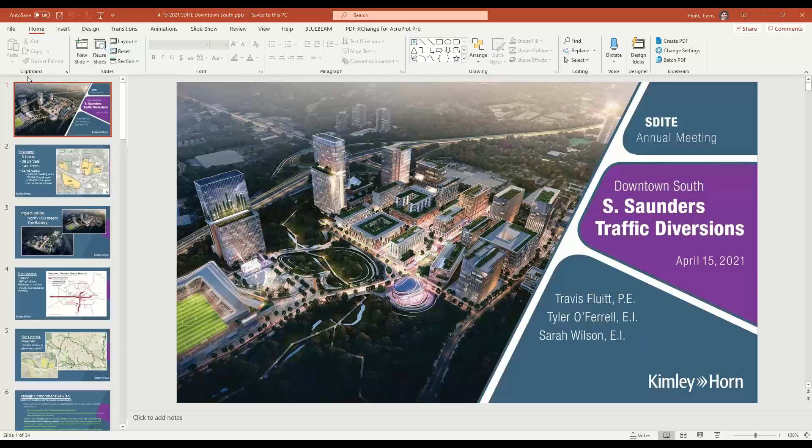Thank you, Sebastian. I'm going to attempt to share my screen. All right, hopefully everybody can see that. So today we're going to talk a little bit about the... I can't see my screen, hang on. The Downtown South development, which is the largest rezoning, at least in terms of traffic, in the city of Raleigh.

And with that, there were some challenges that we ran into. So I'm going to talk about some of the methodology we used as part of that study, and some of the assumptions. So first of all, a little bit of intro to the project. Downtown South, where it's at, is three tracts focused around the interchange of South Saunders Street and I-40 in Raleigh, on the south side of downtown, hence the creative name Downtown South.

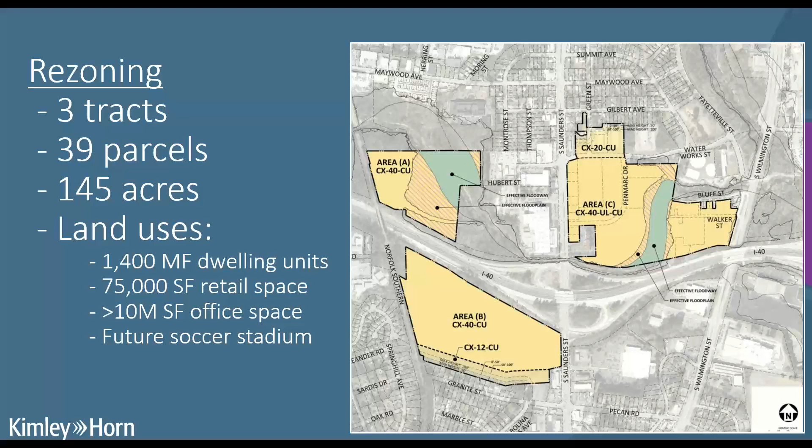So three tracts, A, B, and C. 39 parcels, 145 acres, and the rezoning would allow for up to 1,400 dwelling units, 75,000 square feet of retail space, over 10 million square feet of office space, and a soccer stadium. So for those of you familiar with Raleigh, think North Hills meets the Battery in Atlanta - a very dense mixed-use development with an entertainment component added in, just for good measure.

A little bit of context about the site. This is a shot from the Wake County Transit Plan, which is a very aggressive plan to add increased bus service and BRT through the area.

So the downtown south development will have BRT along the eastern side of the property along Wilmington Street. I think that's planned for 2027, with hourly bus service along South Saunders Street running through the middle.

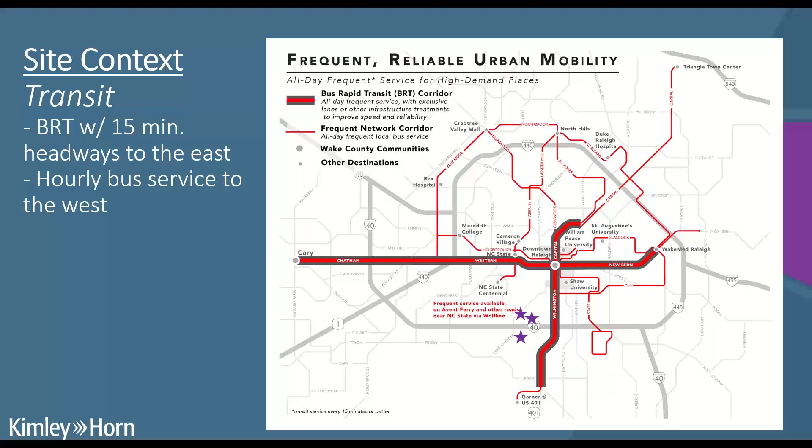Very well connected to the city of Raleigh's greenway system, so a lot of bike ped access. Raleigh has invested heavily in their greenway system, and it shows. So Tract C on the northeast corner is going to have the greenway running right through the middle of it, and that's something that will definitely be amenitized as part of this project and a focal point of the development.

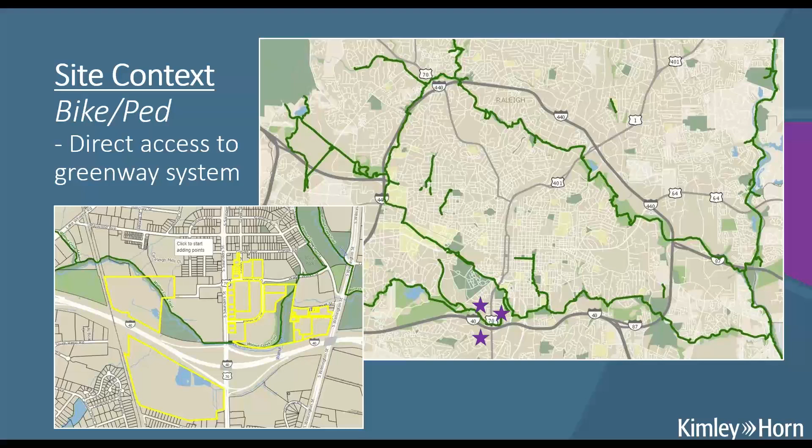So the challenge we faced with this development and this rezoning and the traffic study is that South Saunders Street is a major commuter route in and out of downtown Raleigh. It's a 6-lane roadway with 44,000 vehicles a day, so approaching capacity, highly directional in the peak hours.

But this development is going to add roughly 100,000. The rezoning allowed for about 100,000 new daily trips, most of which are going to use South Saunders Street.

So our traditional, suburban methods of TIA assumptions, doing regular ITE trip generation with minimal internal capture and mode sharing, and then the standard methodology of growing existing traffic counts up to a future year and then just dumping site traffic on top of that, was just not going to work for a development of this magnitude and the transformative nature of this development in the city.

So things we started looking at to combat this: trip generation, we looked at dense multi-use urban rates, really aggressive internal capture reductions, still a pretty modest bike ped transit reduction, but still not enough, not making a dent in the amount of traffic that we were facing.

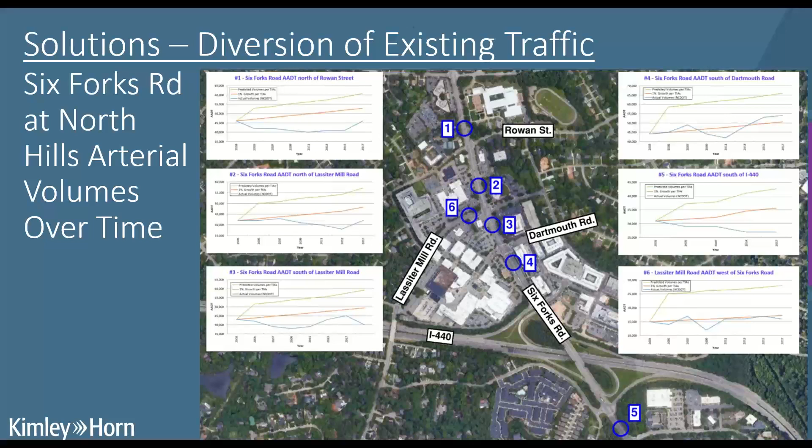So that's when we started looking at things like mode split, and I'll turn it over to Tyler to take it from here. Thanks, Travis. Yeah, just your local Florida man speaking here. So to get into the mode share kind of thing that we looked at, as Travis mentioned, there was some challenges with the congestion that is already existing on South Saunders Street.

And how we expect some of this displacement to happen is that it'll move to alternate modes. What we wanted to do is get a good data set of some other areas around the country about the mode split and how it's changed over time along their transit corridors, especially since the city is building the Southern Corridor BRT along Downtown South's front door. If you want to go to the next slide.

So a couple of the locations we looked at: Austin, and we looked at their Capital Metro Rapid bus line; Charlotte, the Lynx Blue Line, which is light rail; and Cleveland, the Health Line corridor, which is BRT.

The way we went about this is we got mode split data from the American Community Survey, which the U.S. Census puts out every year. I think they poll 3.5 million households or something like that every year, and it's updated every single year, as I said a couple times already. So it represents a pretty good data set for pulling mode split characteristics from.

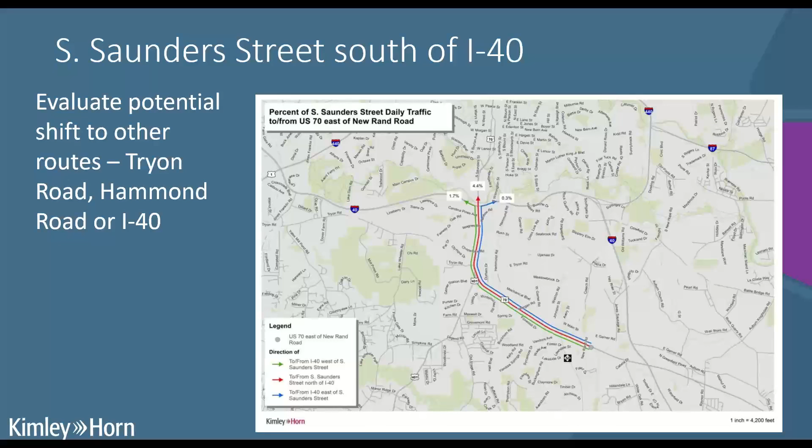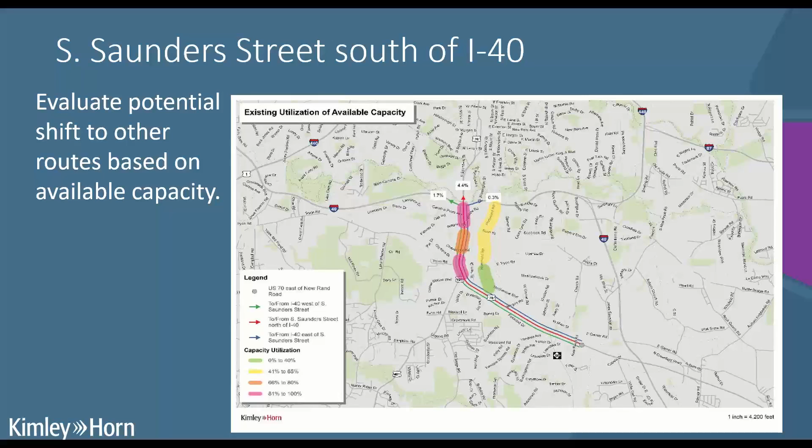So as I mentioned, South Saunders Street is very over capacity. However, the adjacent road, Hammond Road, that I was talking about with US 70, is currently under capacity and is also very well served by I-40. So we felt like that was a good alternative route for those coming up US 70.

And now I'm going to pass it back over to Travis, who can tell you what they decided to do with this information. Thank you, Sarah and Tyler. And I'll just wrap up briefly. Sebastian doesn't yell at me.

But as part of the rezoning TIA, we ended up predicting about a 30% traffic shift on South Saunders north of I-40, and a 5% traffic shift off of South Saunders south of I-40. We definitely got some pushback from DOT and the city of Raleigh on this.

The big question was, well, where is this traffic going to go? As I mentioned with North Hills, I think some of it will definitely be relocated to alternate routes, but I think a lot of it will also be a mode shift, as we've seen with other corridors in Charlotte, Austin, and Cleveland when we add the BRT. I think traffic is now going to be going to and from downtown south instead of to downtown or other developments. And then finally, people are just going to avoid this area because of congestion, and if they're at home, they're going to either not make the trip or go somewhere else.

Next steps, we're now in the process of doing the traffic study for Tract C, which is the northeast tract. We're probably not going to see as significant a diversion just because we're not adding as much traffic to the network as we were during the rezoning. We're going to run the analysis with and without this diversion and see what difference it makes on the recommendations. But the good news is the city has asked us to update this TIA every 5 years, so hopefully in 5 years we'll be able to thumb our noses at the city and DOT and say, hey, we were right. But we'll see you in 2026 and report back on the results.

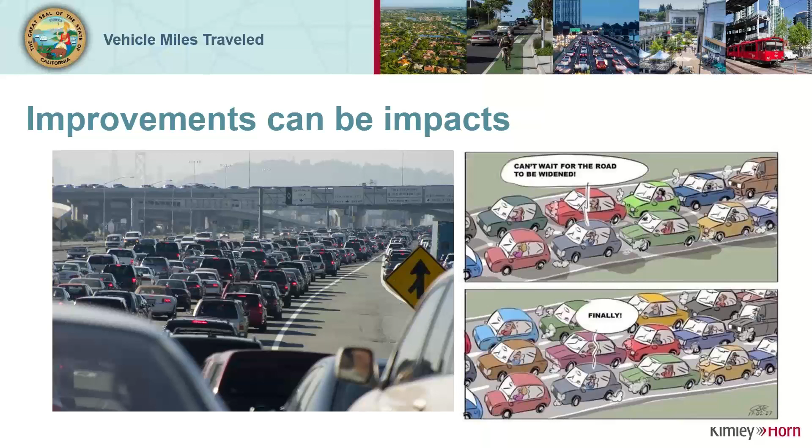I think across the United States, we're starting to recognize increasingly that it's getting harder and harder to build our way out of it by widening projects. And that's part of what I think there's been acknowledgement with this act in California.

VMT is kind of an interesting animal in that it becomes a bit of a thinking game as you get into more complex projects, because you're trying to figure out what is the change in VMT and what's the threshold I'm measuring that against. It's kind of easy to look at residential projects or retail projects or office. It starts to get more complicated when you consider things like a winery, or an amusement park, a cemetery. There's all these other land uses that come about that need analysis, and it becomes a challenge to figure out how to measure that and what the threshold is.

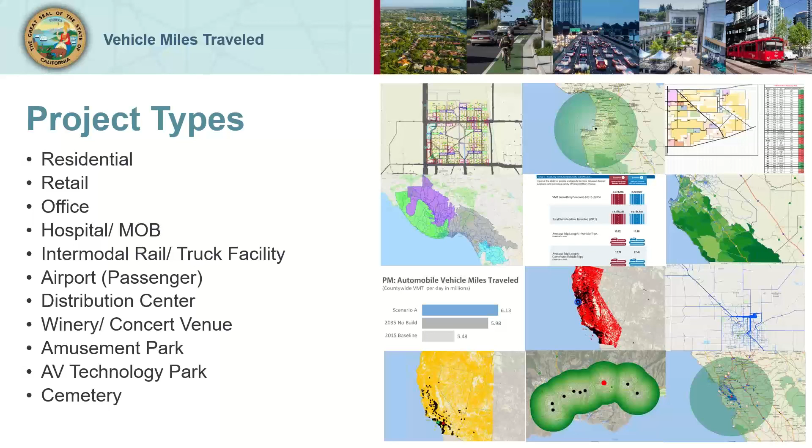In terms of analysis, the travel demand model is really the gold standard for analyzing VMT. There's some nuances to do with it because of truncation with travel demand models, but really that's kind of become the gold standard. But the more we've gotten into it, the more we've learned we also need to bring other tools to bear, like routing and logistics, GIS, sketch planning tools. I'm going to talk about that in a moment too.

One of the interesting areas where we're really seeing a lot of growth or real interest is big data. And I think Sarah mentioned StreetLight. StreetLight has gotten really into that market in California and probably across the US now to really try to help show how VMT changes by different land use categories. There are other folks also working on that. For instance, there's some analytic companies that also do big data, like Replica, that's also working on this kind of thing.

And then we've also had situations where we have to sometimes use qualitative methods, and I've got a great example of that in a minute too.

Just on this slide, continuing talking about tools. One of the things that we've learned about VMT, and this is somewhat true about all models, but we don't often have to think about it, is that if you take a couple different models and ask them to do analysis, they can often give you different absolute values. So what's really important in this type of analysis is whatever you set the threshold in, you also need to do the analysis in.

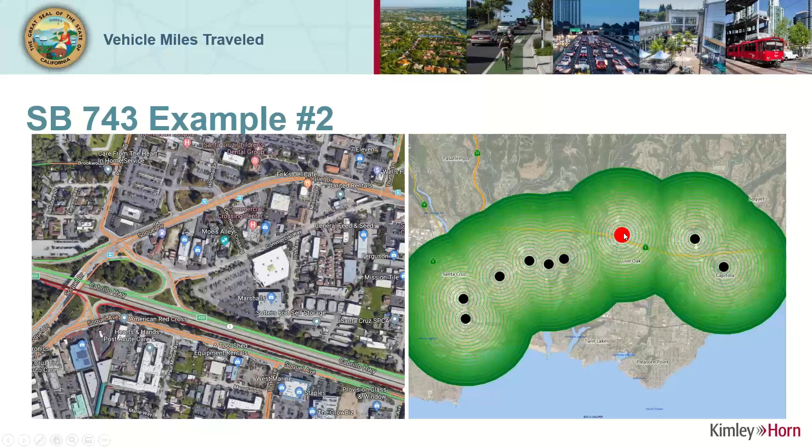So folks that are closer to it are going to change their trip patterns and shorten their VMT. So it's not a VMT impact. Very different outcomes. So you can see, once again, the residential example showed us something we're all concerned about to some extent—urban sprawl. At the same time, this is helpful for encouraging infill development.

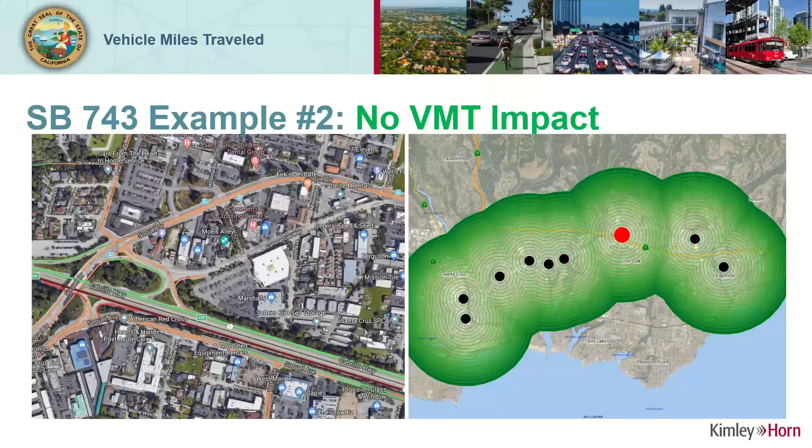So what are we finding out as we get further into this experiment in California, I guess, if you want to call it that? We're finding that it's giving very counter different results in level of service. And that was by design—that's what was trying to be accomplished by introducing this.

So you can see level of service, what we all know in urban areas—it's hard, it's congested, it's difficult to mitigate. VMT, meanwhile, shorter trips, is a good indicator that says this is a good place for us to encourage infill development. LOS in rural areas encourages urban sprawl; meanwhile, that's less the case with VMT.

And you can see retail kind of across the board wins in the VMT world, but roadway widening is this other animal—you can see that level of service does better with it, while VMT not so much. So VMT does provide a valuable counterbalance to LOS.

I just want to speak to the fact that level of service isn't dead. I think, maybe early on, we were all wondering how we were going to deal with LOS, and what we've found is they're almost complementary measures in some way. Like I said, VMT can help offset some of the concerns that LOS can encourage. LOS is still an important metric in most locales—they just handle it through a different mechanism than maybe they did in the past. We still use it to focus on things like site access, as a proxy for safety, and congestion management programs.

But what I'm also seeing is there's been a rise of other metrics. As level of service has maybe lost a little of its importance, VMT has gained some of it. Now other metrics are starting to become more important too—safety, travel time reliability, air quality, throughput. And in some ways, I think it's showing encouraging early signs that may help us build a more balanced transportation system.

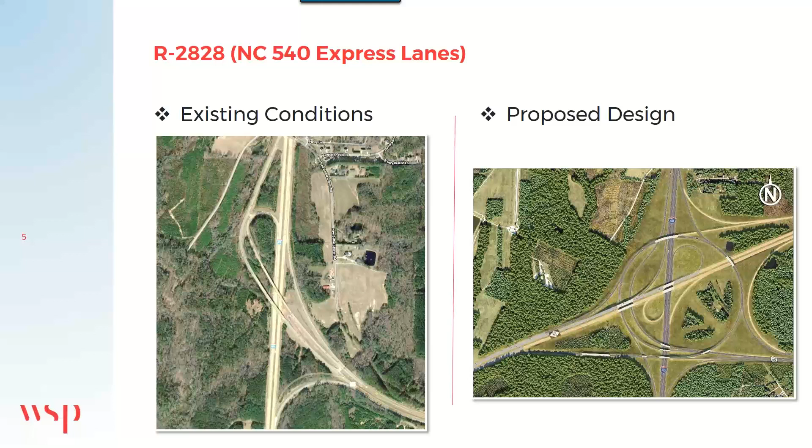And then where the new 540 bridges over I-40 are is pretty much almost right where the existing flyovers are, just to give you a reference point of what that looked like on top of each other. You can kind of see it there on the image on the right underneath, a little bit light there.

But a few of the challenges on the project: we actually had another design build project awarded a few months before ours. It was the I-5111 project, widening of I-40, pretty much a couple miles on either side of our project, with our project right in the middle of theirs.

And so that created some conflicts or issues where we needed to work through traffic shift patterns, work schedules, and work areas in general to make sure we weren't in the way of the I-5111 team or vice versa - so everyone could get where they needed to, traffic was where it needed to be, and we didn't have conflicting work areas.

We had a major earthwork move that needed to cross I-40, about 1 million cubic yards of dirt. So that was an issue - we needed to figure out a safe, efficient way to get that earthwork across I-40.

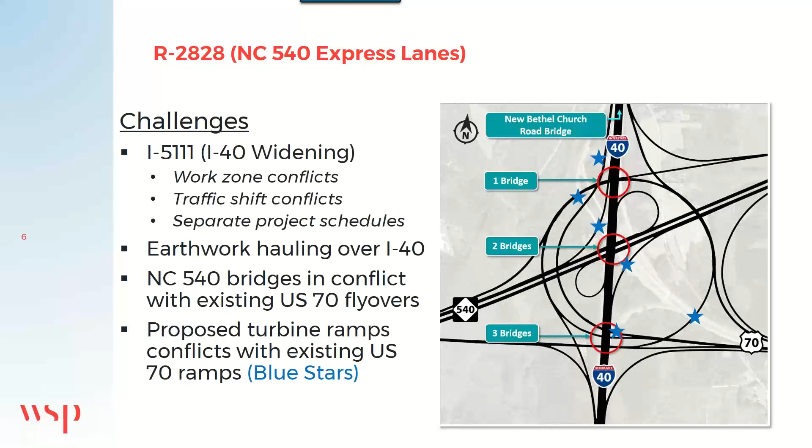We had about 7 bridges within a mile. You can see the 6 on the screen, and then one just north of where the screen cuts off. The blue stars represent all of the ramp conflicts between existing and proposed movements that we had to work around to get the new turbine built.

So it was a little more narrow than the contractor would have preferred. Typically we would have shifted traffic towards the outside to do that work, but I think it was 25 or 26 feet, so it was enough for them to get the equipment and material in there and do it.

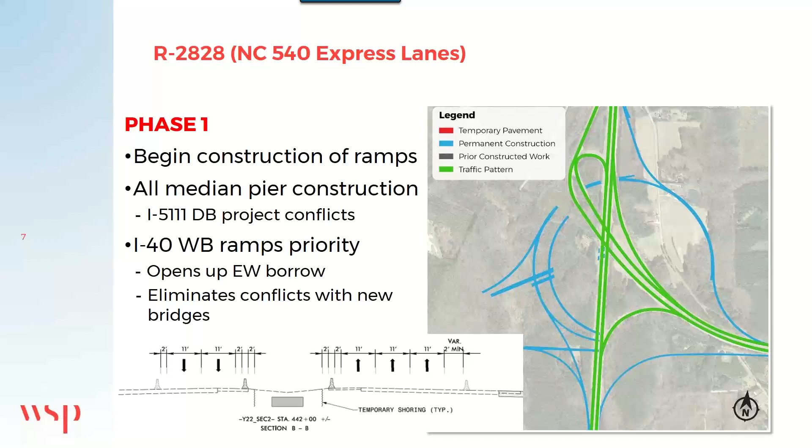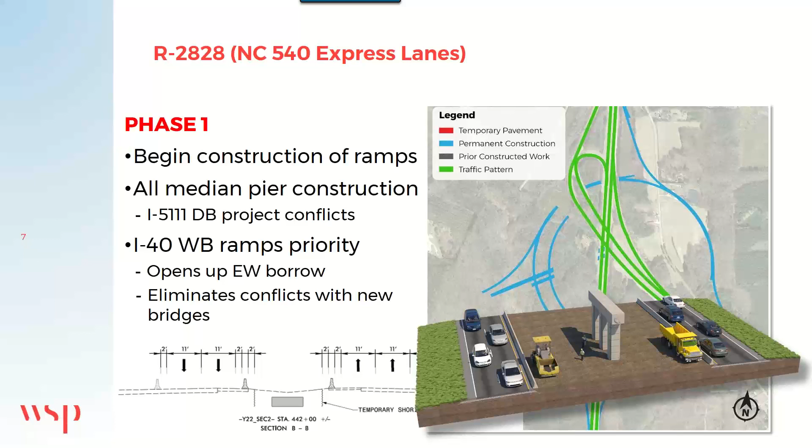Again, it eliminated a conflict in the typical section there, where if the I-5111 team is trying to do grading and paving and our team is trying to have cranes, material, and building piers, that just wasn't going to work out well for anyone. So we were able to get in there early, get those built, and get out of the way before that became a conflict.

In the next phase, the I-40 westbound ramps were moved onto the new turbine, shown in green, and that let us build the 3 southern bridges to the bottom of the turbine shown in blue. Really the big benefit was the middle bridge there — we actually over-designed to accommodate off-road earthwork hauling trucks, reinforcing the bridge deck, the substructure, everything needed to make sure those typical off-road vehicles would be able to use it to move the dirt we needed to move.

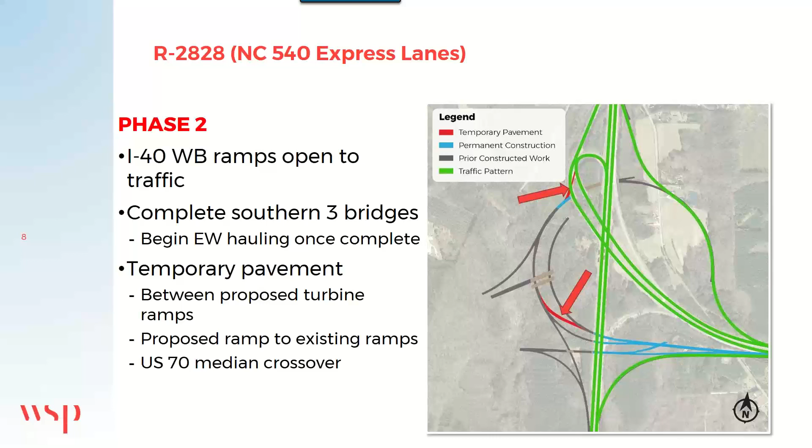The other thing to point out is the red temp pavement you see there. Once traffic crossed over the I-40 bridge, the northern one of the 3 in that group, we crossed them over to the outer loop or outer turbine ramp, and then split back to the existing ramps on the northwest quadrant of the interchange to go back to the existing ramps and ultimately tie back to I-40.

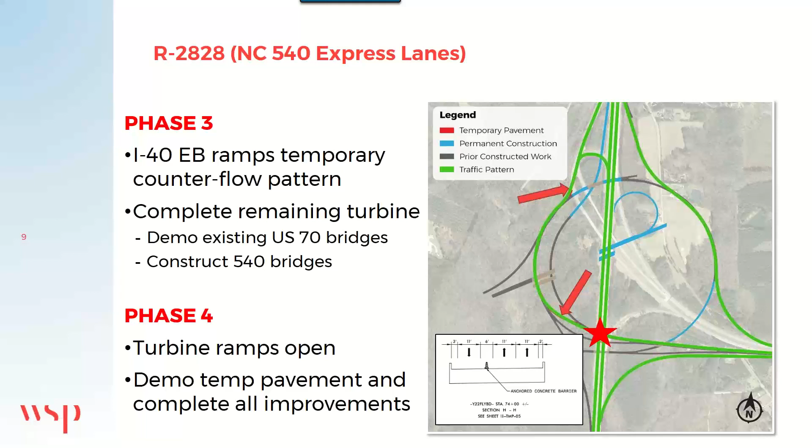What that did is got all of our ramps now either on new ramp pavement or at least outside of the full turbine footprint, and that allowed us to finish all the movements we needed for the turbine. That got us to be able to shift traffic basically to the final pattern, and then just do some finishing work, demoing that temp pavement and getting everything to its official final pattern.

So the accelerated median piers really helped with overall schedule, and also eliminated the conflict that would have had contractors in each other's way trying to build their improvements. It did have some additional cost to our team because if we'd had traffic shifted further out, we wouldn't have needed to shore for those foundations, but it was a minimal cost to help with those other improvements.

The temporary turbine pattern helped eliminate some of those ramp conflicts and get that traffic pushed to the outside of the turbine ramps a little faster. And being able to use the crossovers allowed us to use the other bridges for the earthwork hauling. So again, a big project schedule efficiency there.

The next project is U-5717, at US 15-501 and Garrett Road. This is in Durham, North Carolina, just outside Raleigh. You can see on the screen the existing conditions: very congested, lots of lanes, a signalized intersection. 15-501 has a 6-lane approach in both directions, with 3 through lanes, dual lefts, and a dedicated right. Garrett Road has 3 to 4-lane approaches depending on the approach.

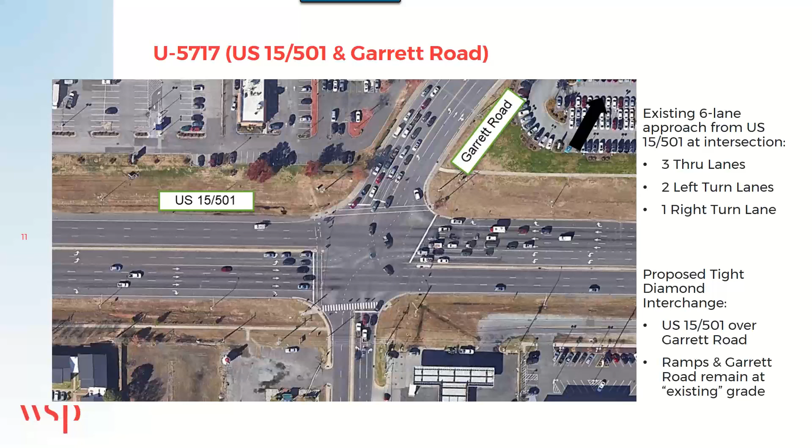And if you can see here where the parking lots and service roads are, when I transition to the next screen, we were building a tight diamond, essentially a grade separation of 15-501 going over Garrett Road, with ramps and retaining walls staying low to access existing Garrett Road and some widening along Garrett Road as well. You can see it's not really that much of a bigger footprint when you look at the comparison, and where it's hitting the existing parking lots, where we had room to shift traffic away and build this improvement.

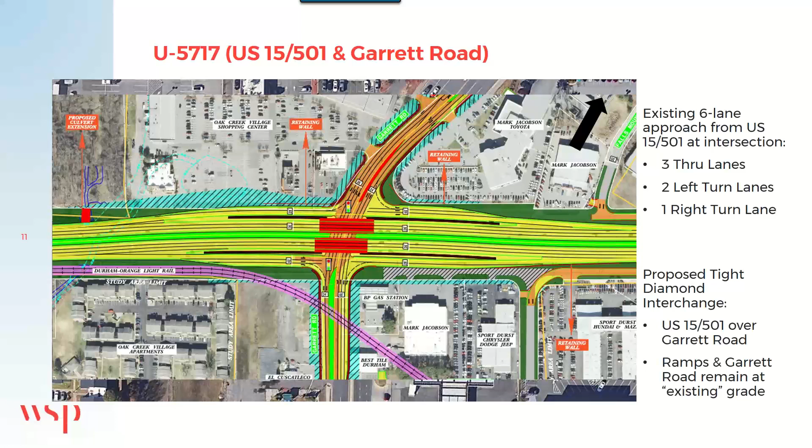Like you typically would for a widening job or a grade separation job. So what we had to do is figure out ways to maintain the traffic operations at the intersection, but hopefully get rid of some of those lanes.

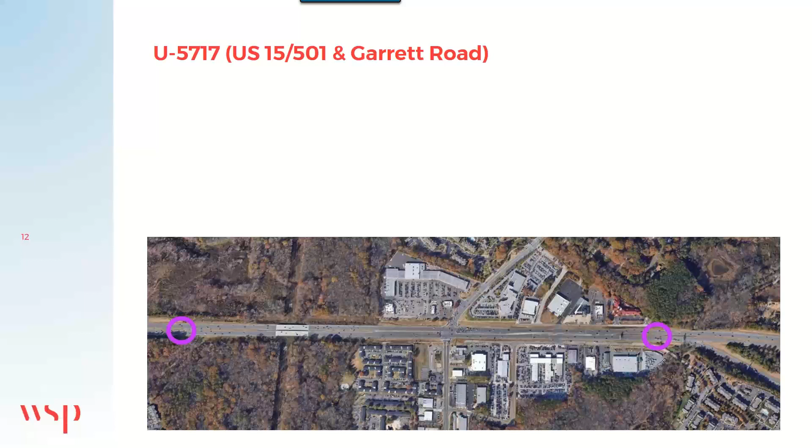What we ended up coming up with was a temporary U-turn, or super street, design, where the purple circles here away from the intersection in the middle - we looked at Synchro and some traffic analysis just to get basic justification for that, and we actually ended up getting level of service C or better for the existing intersection and the U-turn movements. So basically we used temporary pavement to build what we needed for the U-turns and the left turns downstream.

That allowed us to take the existing intersection down to just 3 through lanes and a dedicated right for each approach on 15-501, and basically triple rights from Garrett Road for both approaches, taking those turning movements and through movements on Garrett Road downstream to the signalized U-turns.

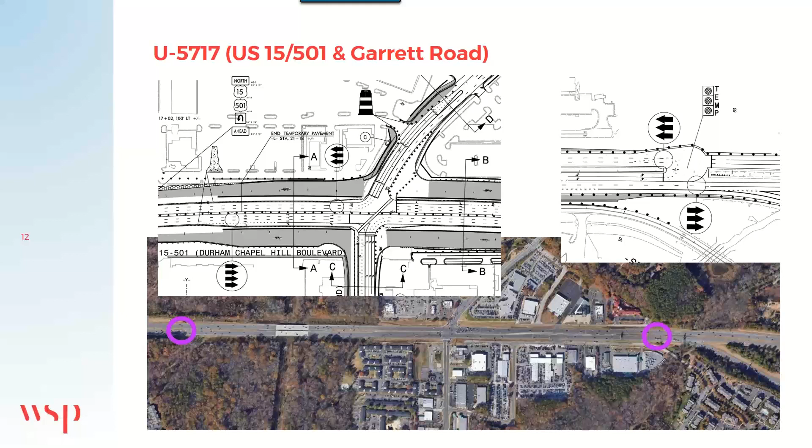From there, we were able to shift westbound 501 traffic onto the new ramp pavement to maintain access at Garrett Road, again still working in a temporary super street pattern for both directions. That let us build the first stage of the bridge, some retaining walls, and get a lot of that pavement built up high in the middle of traffic.

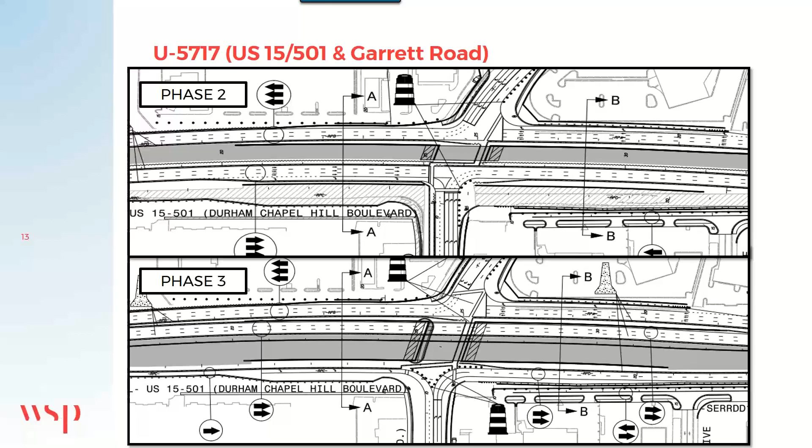From there, we shifted eastbound traffic onto the new bridge and used the eastbound ramps to maintain traffic to Garrett Road, again with traffic merging off the screen and then going downstream to the U-turns to make those movements and come back to the main intersection.

So again, the big benefit here was really just constructability. I'm not sure exactly what the cost and schedule impacts were, since we didn't get far enough to figure out if it was even constructible with the lanes we had. We realized very early on that 6 lanes in both directions would have required massive amounts of temporary pavement, temporary shoring, and right-of-way costs. So it didn't go very far before we realized we had an issue - constructability was really the main driving point here.

Another project is I-3802A. This is in Kannapolis, North Carolina, just outside Concord, maybe an hour north of Charlotte. This is an existing full cloverleaf interchange, again at US 601.

And the proposed design was to construct a DDI. You can see here - this is actually the DOT's preliminary concept - but it shows really well a lot of the conflicts between the existing loops and ramps and the proposed DDI ramps, and some of the issues or conflicts you have trying to stage construct a new interchange configuration like this.

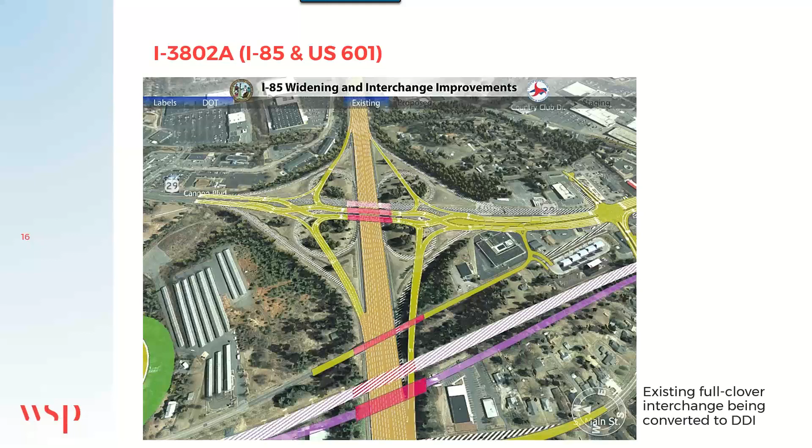Again, we used Synchro and SimTraffic to look at level of service and queuing, though since these were temporary conditions, it was more preliminary analysis, just for justification. I think we had a level of service D for one of the intersections during one peak hour, but everything else was C or better. And again, because of the benefit to constructability, we were able to get that approved through DOT and move forward.

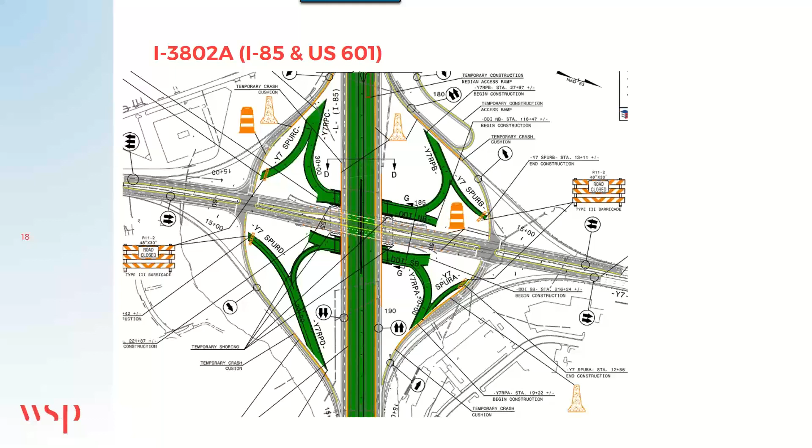So again, you can see once that pattern opens up, how much eliminating those loops allowed us to build the DDI spurs and ramps in the middle of the intersection. And again, just a signalized left turn from US 601 and a full movement approach from the ramps coming off of I-85.

And another feature that isn't shown in the slides - we actually had another step later on where traffic was able to get onto the new ramps, but still have some temporary pavement to tie back to this existing, or temporary, diamond configuration.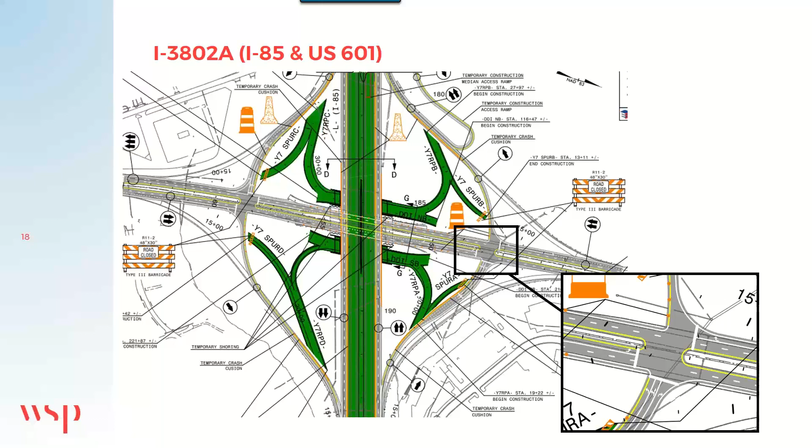This project's in Statesville, North Carolina, about an hour and a half north of Charlotte on I-40 and I-77. In the picture here, I-40 is east-west, I-77 is north-south. You can see this is I-3819B.

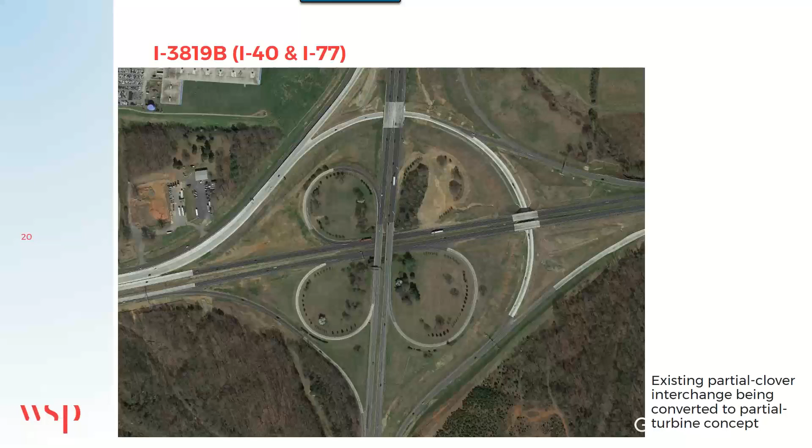They had an A project that came before us. Essentially what it built is a kind of fly-under, where it took away the top right loop, and a lot of the new ramp pavement you can see in the concrete paving on the top left quadrant. For the most part it replaced that top right loop with the fly-under of I-77 and I-40. This is the DOT's concept map drawing. The purplish blue color is all structure and the green is pavement. You can see they had pretty large third level structures for flyovers for I-40 movements to I-77.

One of the things we looked at very early on was ways to reduce the overall cost and footprint of these structures. Overlaying our project rendering for the actual design we got the project with, you can see how much less structure design we had, and how smaller or more condensed the footprint of the interchange became by pulling those ramps in. We eliminated the third level construction of the bridges, kept everything at 2 levels - a much more efficient, cost-effective design, and constructability of not trying to build 3-level bridges was a betterment as well.

One thing I want to point out too is the green pavement just to the left of our rendering where the yellow arrow popped up. We actually did realign I-77 to help with the bridge staging of the 77 bridges over I-40. The preliminary hearing map design had everything right on top of each other, and we would have had to widen the bridges temporarily, extra width than needed for the permanent design, just to account for constructability. So to save on some bridge deck quantity, we actually permanently relocated 77 to help with that constructability.

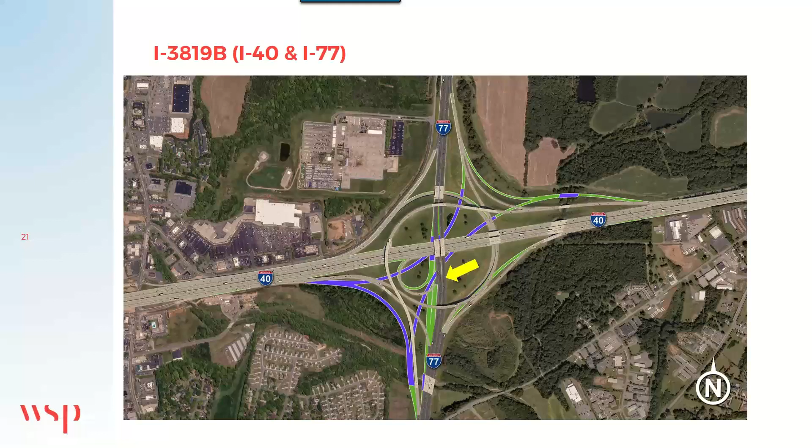Another thing we did is we wanted to isolate the I-40 pavement and improvements from I-77, again to enhance our construction schedule. So one of the things we looked at was taking I-40 under the existing I-77 bridges. You can see the street view image on top - the red arrow shows the existing slope abutment for the 77 bridges. The bottom left plan view has the red arrow showing where traffic ended up going through that existing southbound structure. What that let us do is not have to wait for these 77 bridges to be built and the existing ones demolished before we could shift I-40 traffic.

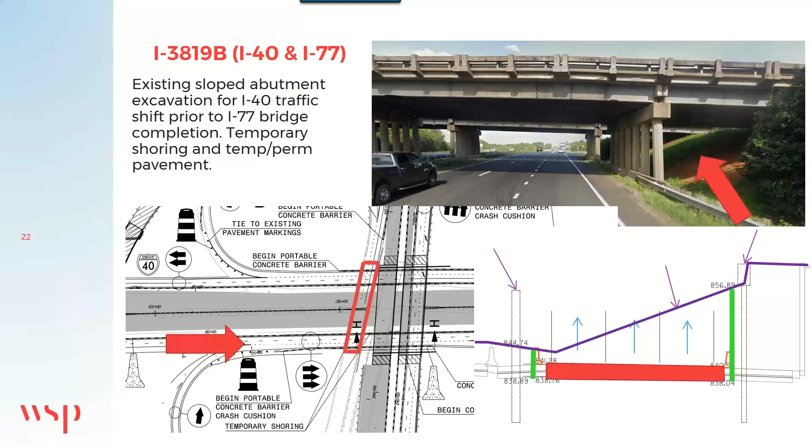In the typical section on the right, the purple line and arrows point to the existing bridge columns and existing sloped abutment. We excavated that down using temporary shoring, shown by the green lines. That let us take all that fill down, still support the columns and the bridge, and build our permanent pavement, the red box shape, at its final elevation. We just had a little bit of temporary pavement for the shoulders and barrier to sit on against the shoring wall. That let us get I-40 traffic shifts independent of the I-77 bridges, a big efficiency from a schedule standpoint. Those are the main benefits for that excavation - significant cost there, since those shoring walls were not small, and some temporary pavement needed to fit the barrier and shoulder widths.

And then there's the permanent I-77 realignment. We looked at temporary mitigation to stage those bridges, and it ended up being cheaper overall to do some additional earthwork and move 77 than to widen those bridges just for constructability.

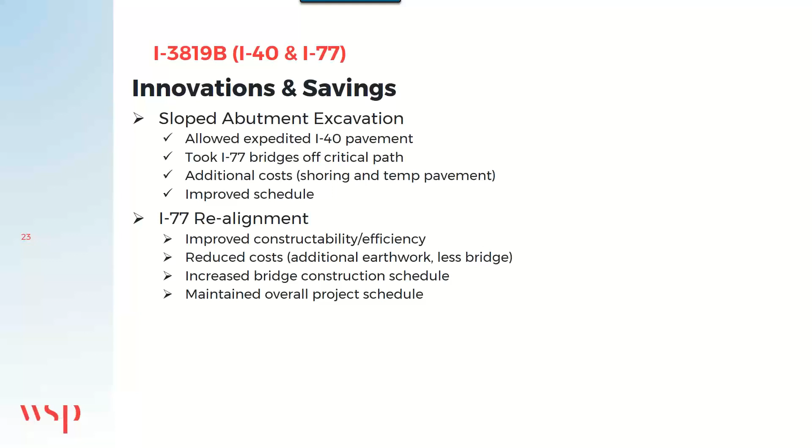The last project I'm going to touch on is U5908 in Huntersville, North Carolina. The image on the right shows Main Street and NC Highway 115 are parallel streets. They meet up at the green stars, and the blue star and red star are kind of the same location on both aerials.

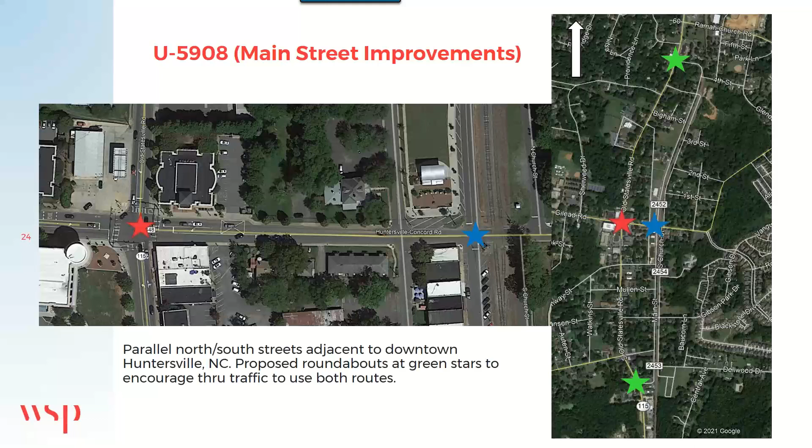You can see there's a really congested intersection at the red star. It's Huntersville Concord Road and NC Highway 115. There are several buildings right at the back of the sidewalk, so not a lot of room for turn lanes or your typical intersection improvements.

So one of the concepts, and what we ended up moving forward with for the project, was basically dual roundabouts where you saw the green stars on the previous slide, where Main Street and Highway 115 come together. Really it's just to encourage folks to use Main Street as an alternate route through that intersection, since there weren't typical methods or room to do your typical widening.

But one of the conflicts or challenges we ran into was the southern roundabout had some right-of-way issues where we couldn't pull it completely offline. There was a historic property in one of the quadrants, and just because of the geometry, we were forced to do a closure of one of the legs to finish construction of the roundabout. We were able to limit the amount of work needed where we felt a 30-day closure would be sufficient.

But what we didn't want to do is close Highway 115 traffic, because it's certainly the highest volume on the project and just a pretty high volume corridor in general. So what we did is actually kept them in still a conventional two-way pattern through the roundabout on the side that was constructed in a previous step, and kind of just snaked them around the center island with a typical T intersection for the one leg that stayed open on the south.

We actually ran AutoTurn for that, and large trucks could make the movements through there, but they obviously had to encroach onto the center truck apron island. We had some safety concerns that if the trucks didn't know they needed to encroach onto that, or didn't turn quite hard enough into that, maybe there would be a chance for those trucks to overlap lanes.

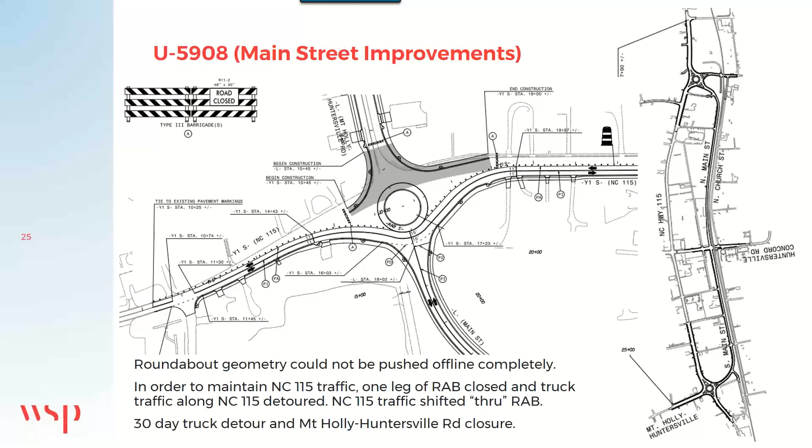So we actually put in a truck detour for that same 30 days as the leg closure, to bypass the truck traffic as much as possible, hopefully all of them. But again, if some trucks do come through, we did have the room to make those moves. So again, the biggest benefit there was really just safety and being able to maintain those high through volumes while improving constructability there. So with that, I will take any questions now.